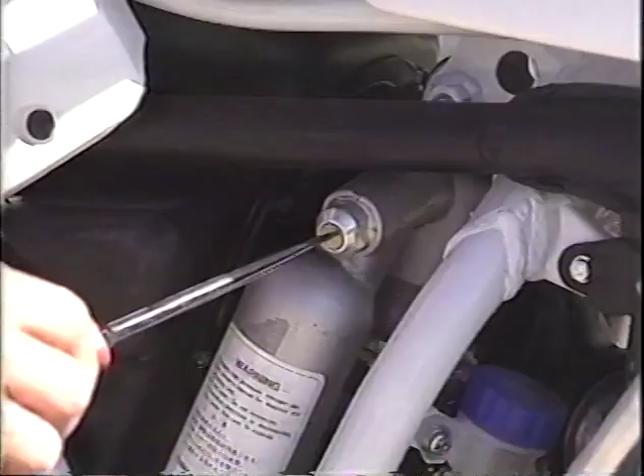When you've been racing motocross as long as I have, you learn to appreciate the benefits of fine-tuned suspension. Suspension can mean the difference in winning and losing a race. There are no tricks or shortcuts. You've got to follow the basics. Tuning the suspension on your YZ is not simply a matter of setting it and forgetting it. Instead, it's a process of testing, adjustment, retesting, and readjustment.

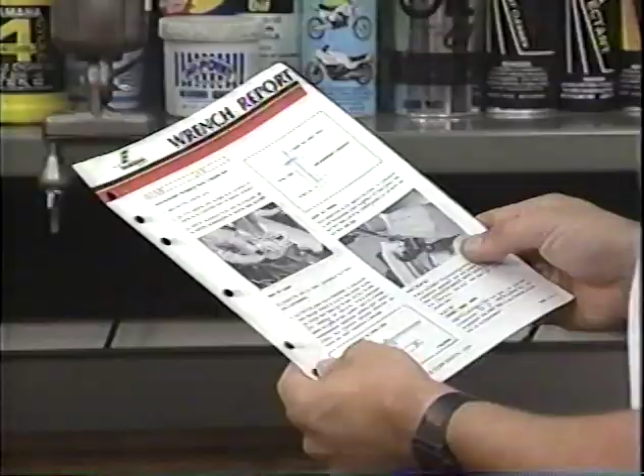So where do you begin? Ride height is your first adjustment. Ride height and other current suspension adjustments can be found in Yamaha dealer wrench reports for your model and rider's weight. Ride height, in our example, should be set to 96 millimeters. So just what is ride height anyway?

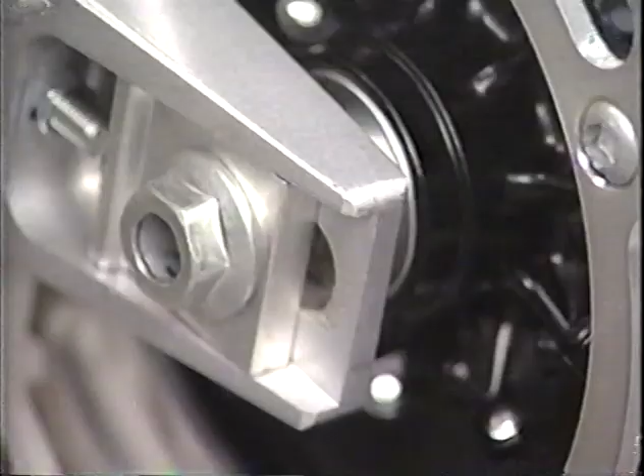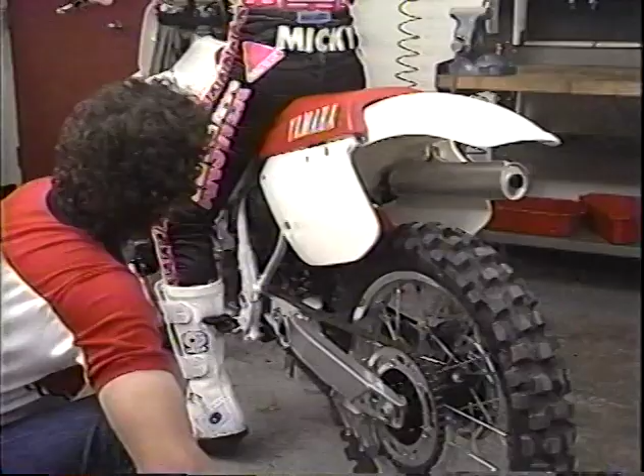To determine ride height, measure the distance from the rear subframe to the rear tip of the swing arm when the bike is completely unsprung. Then have the rider mount the motorcycle and center himself on the seat. Be sure the rider is suited up exactly as he would be when riding. Work the suspension a few times to avoid sticking and remeasure using the same points as before. Subtract the loaded measurement from the unsprung length to derive the ride height.

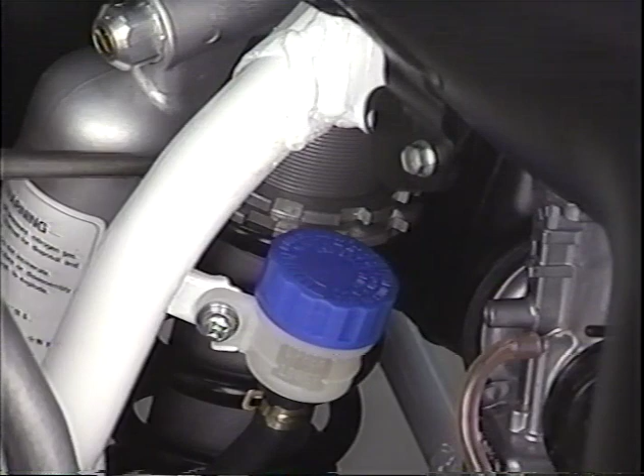If the ride height needs adjusting, loosen the lock ring on the spring and use a screwdriver to adjust the set length of the spring. Set length simply refers to the length of the spring as it is mounted in the shock. When you shorten set length, you shorten the ride height. When you lengthen set length, you lengthen the ride height.

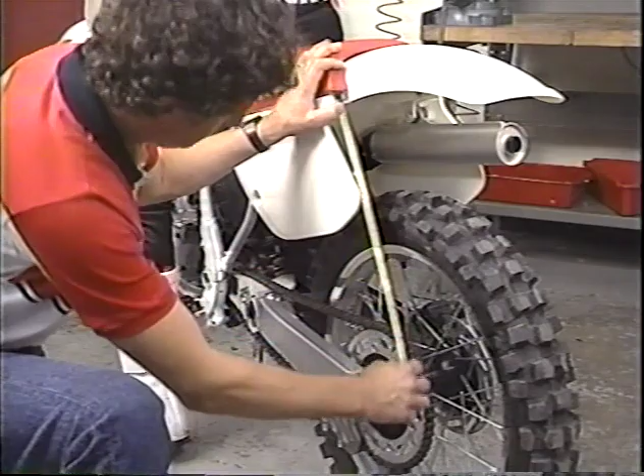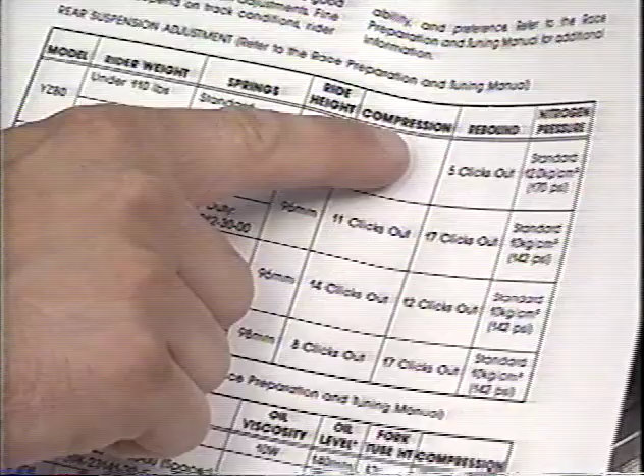Adjust the set length of the spring as necessary, then remeasure using the same points as before until the ride height is correct. Then lock the spring's adjuster nut down at the correct setting. Now you're ready to set up the compression damping. Again, use the specifications in the wrench report for the initial setup. Compression damping for the model in our example should be set at 14 clicks out.

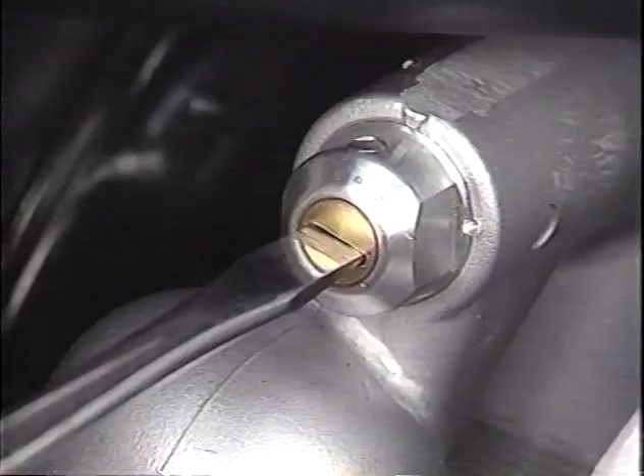Set the compression damping by turning the adjuster screw all the way in clockwise. Then back the adjuster out, counting the clicks. When you adjust the compression damping, you're adjusting the amount of resistance the shock exerts during compression. Back the adjuster out the number of clicks recommended in the wrench report, and you've preset the compression damping.

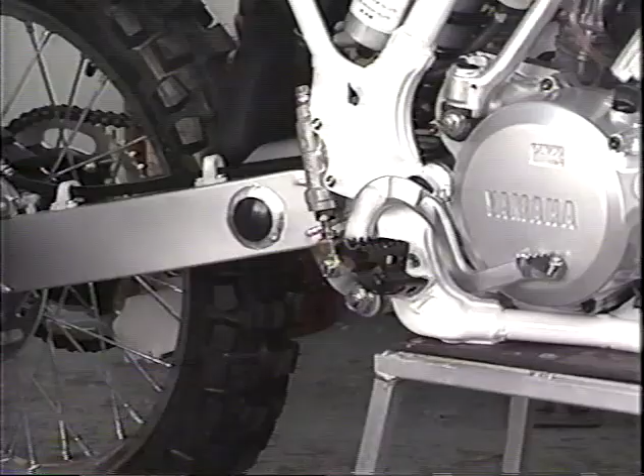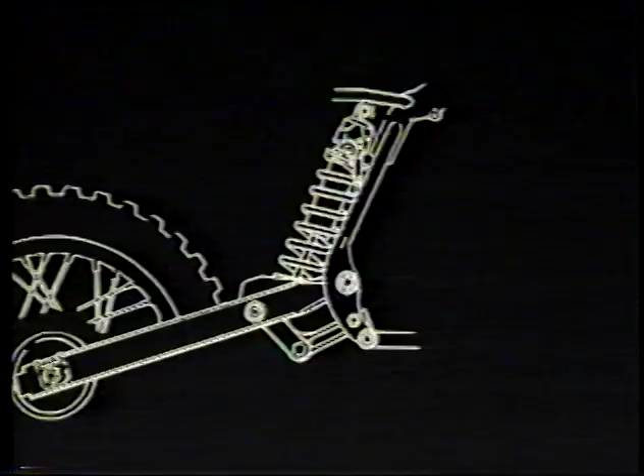Now set up the rebound damping. Rebound damping is adjusted at the base of the shock. Turn the adjuster screw clockwise until it stops. Then back it off to the number of clicks suggested in the wrench report. When you adjust rebound damping, you're adjusting the amount of resistance the shock exerts to reduce or dampen rebound. Preset rebound damping with exactly the number of clicks recommended.

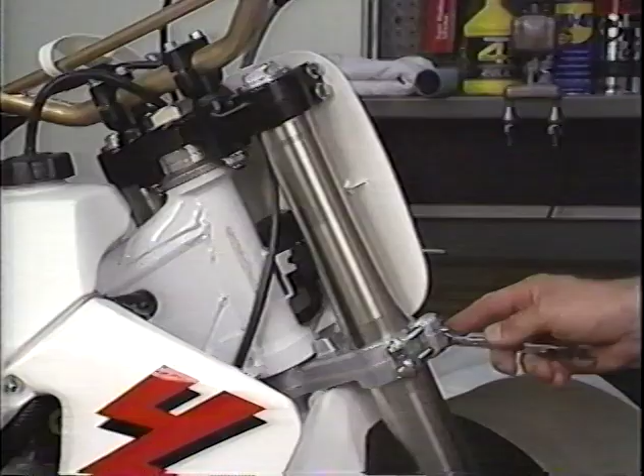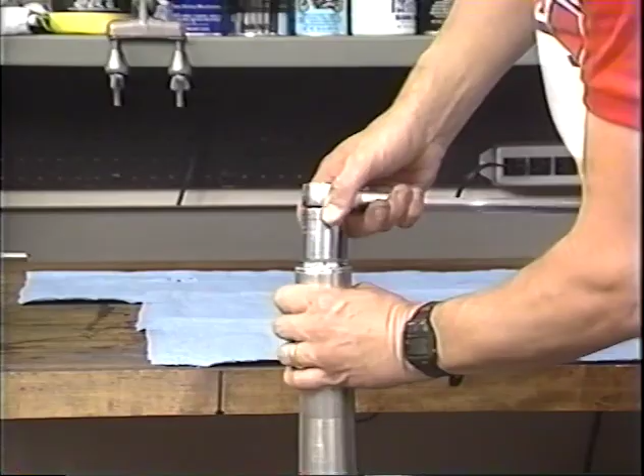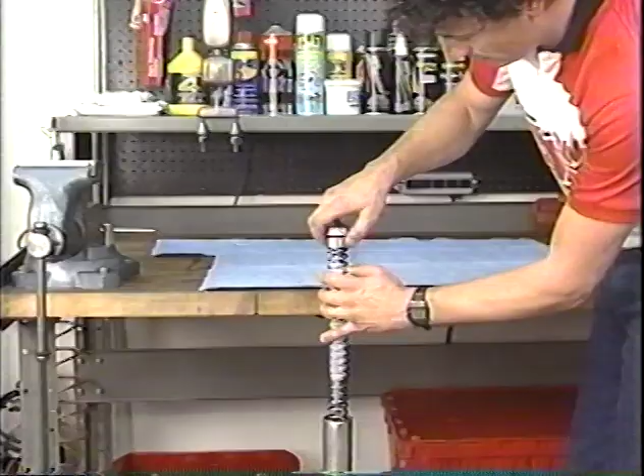Now check the wrench report for preset specifications on the front forks. Although it is not necessary for initial setup, you should always change to fresh fork oil during fork rebuild. It's easiest to simply remove the forks from the bike. This will allow you to make several setup adjustments easily, and during rebuild you can check the general condition of seals, bearings, fork springs, and other components as you disassemble the forks. Remove all components carefully. Of course, you should always refer to your owner's service manual for complete fork disassembly procedures.

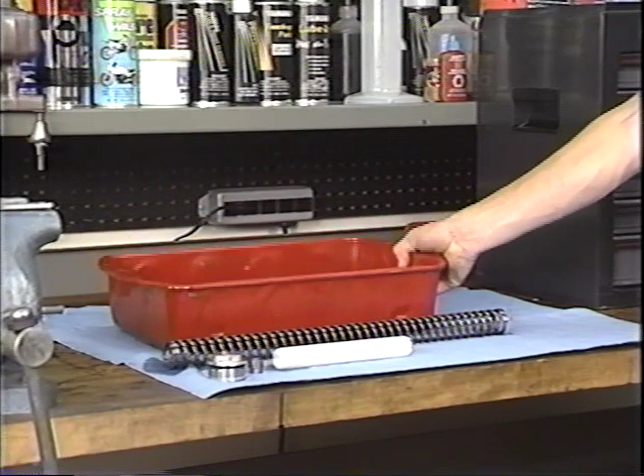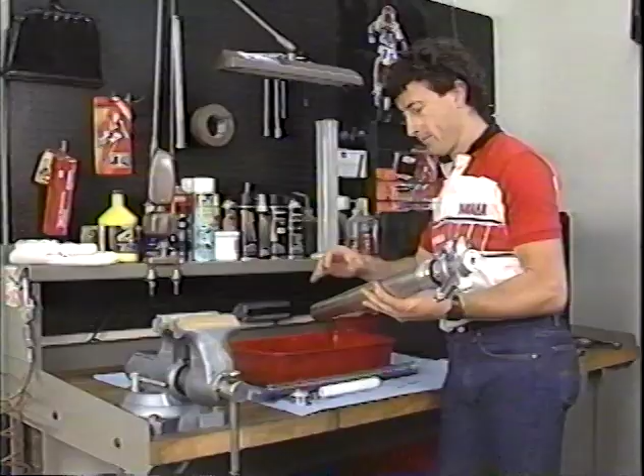Now, pick up the fork from the bottom clamp to avoid leakage and compress the forks over a drain pan to pump out as much of the old oil as possible. Be sure to hold onto the inner cartridge rod. Then mount the fork in a vise. To further disassemble the fork, remove the dust seal and the fork seal retainer clip.

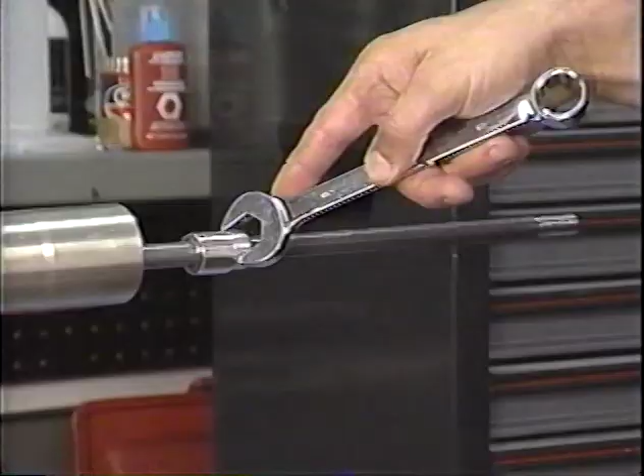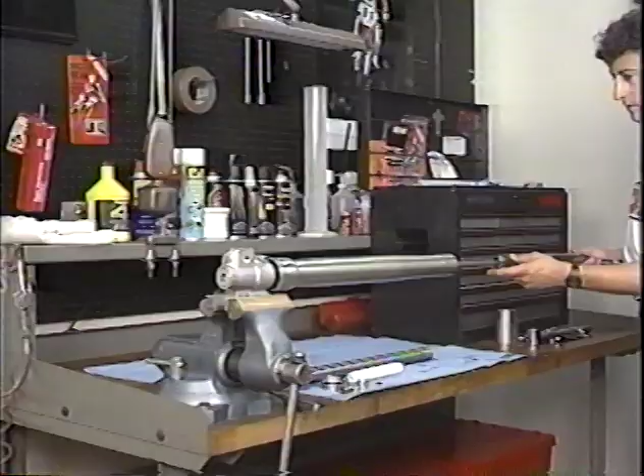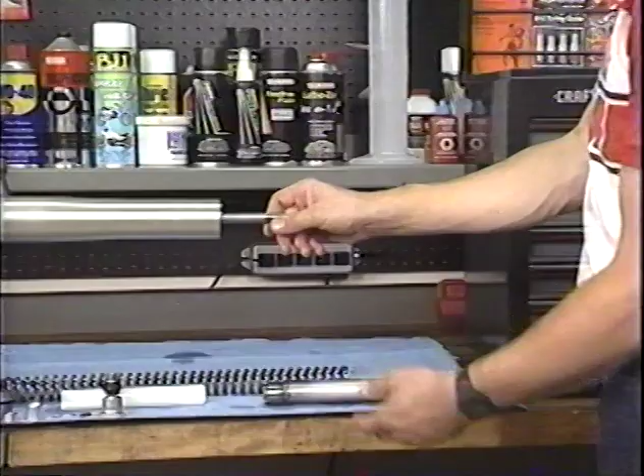Extend the piston rod, then unbolt the bottoming cone assembly, which will split into two pieces. Remove the retaining clip, slide the assembly off the shaft and insert the Yamaha cartridge holding tool. Now, loosen and remove the compression valve assembly. After removing the cartridge from the fork, grasp the fork tube firmly and use a slide hammer effect to remove it from the leg. Remove all components carefully.

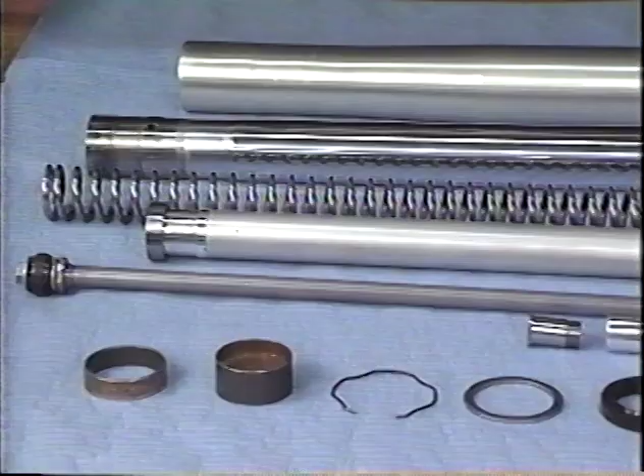Now is the time to inspect all disassembled parts. Any sign of wear on bearing surfaces indicates the bearings should be replaced. A good bearing will have a full Teflon coating as shown here. To retain optimum performance from your forks, replacement is recommended after 10 hours of use. All rubber seals should be inspected closely.

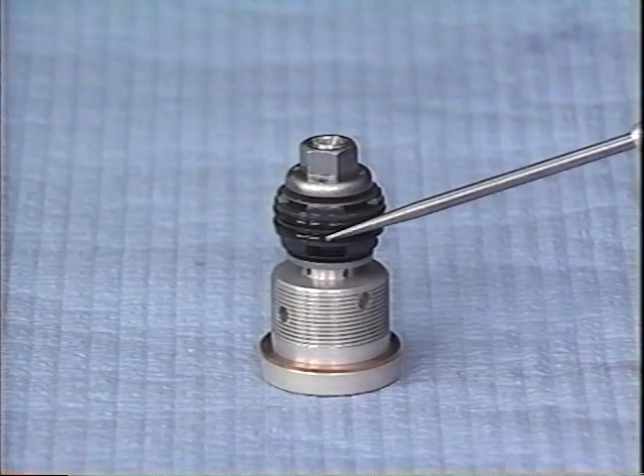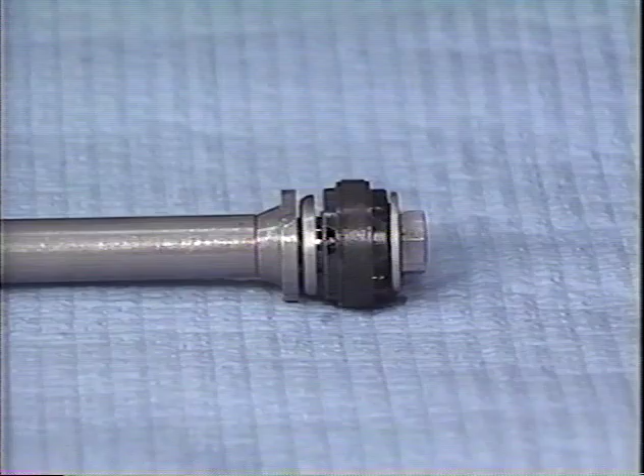Check the O-ring seals on the compression valve for tears or abrasions. Pull on the valve to check spring tension. Look for debris and make sure the shim moves freely. Replace the assembly if necessary. And don't forget to check piston rod valving using the same techniques as for the compression valve.

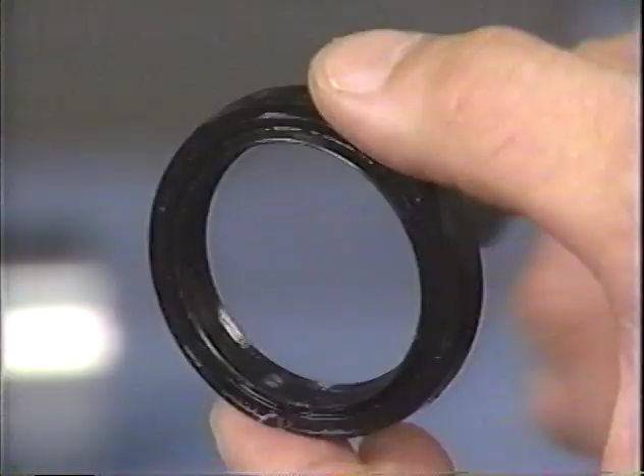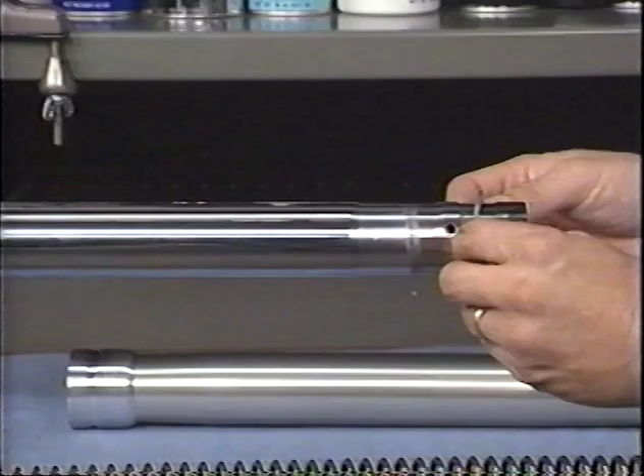Now refer to the Yamaha owner's service manual for complete fork reassembly. First, on the inner tube, install the dust seal and fork seal retaining clip. Apply a generous amount of grease to the fork seal and install. Make sure all parts are facing in the right direction. Next, install the washer and fork bearing.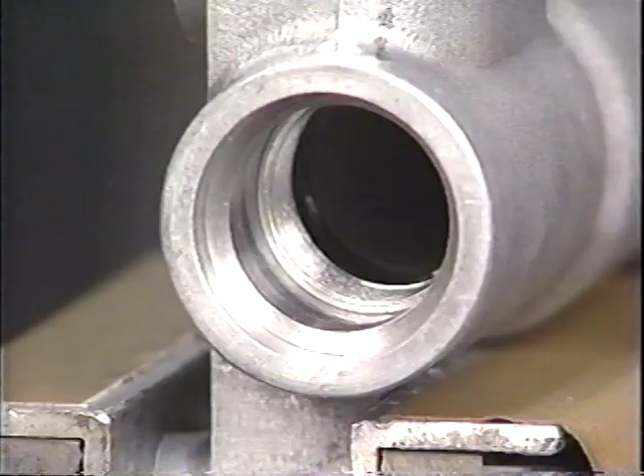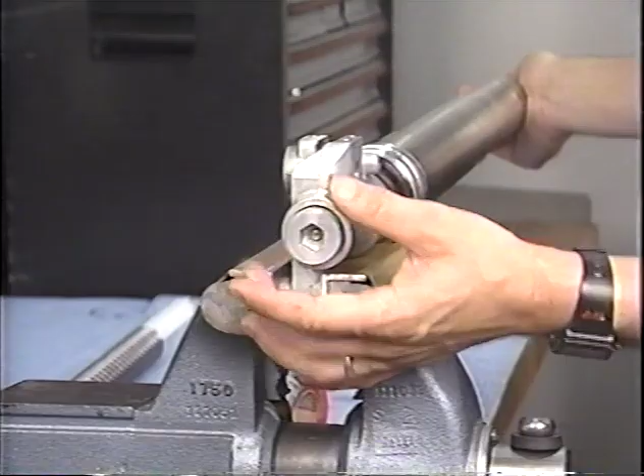The piston should then be installed onto the slot on the inner tube. Install the outer fork tube. Now, insert the piston rod into the cartridge and insert the cartridge assembly until fully seated. Then, replace the copper washer and compression valve. Be sure to grease both O-rings before installing. Torque the compression valve to 40 foot-pounds.

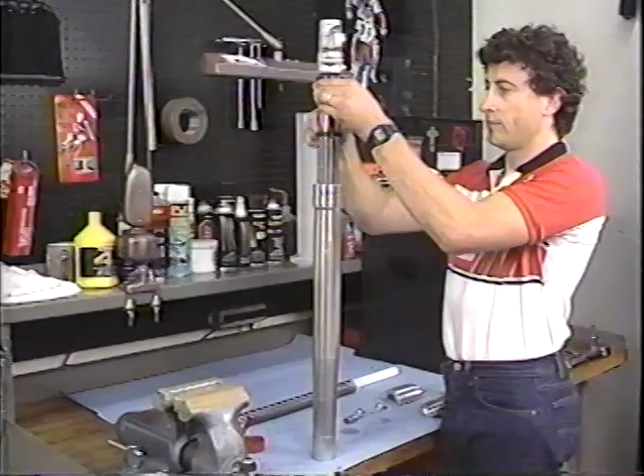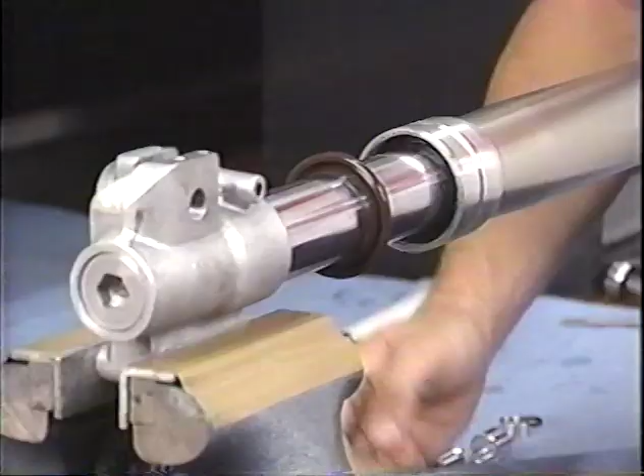Press the bearing into the fork slider using the Yamaha fork seal and bearing tool, making sure it is fully seated. Next, install the fork seal, again using the Yamaha fork seal and bearing tool. Replace the fork seal retaining clip until it is fully seated in its lower groove. Then install the dust seal.

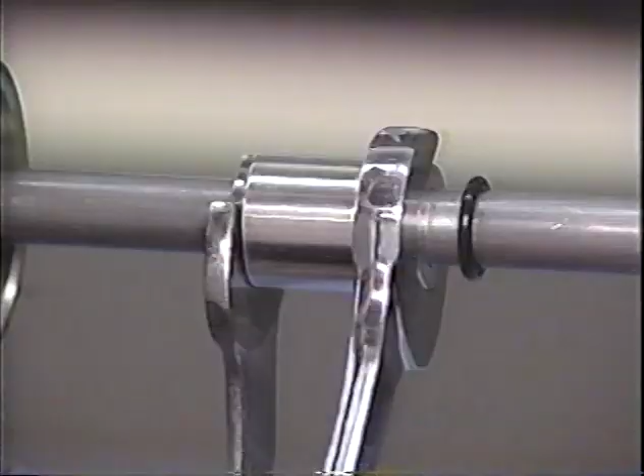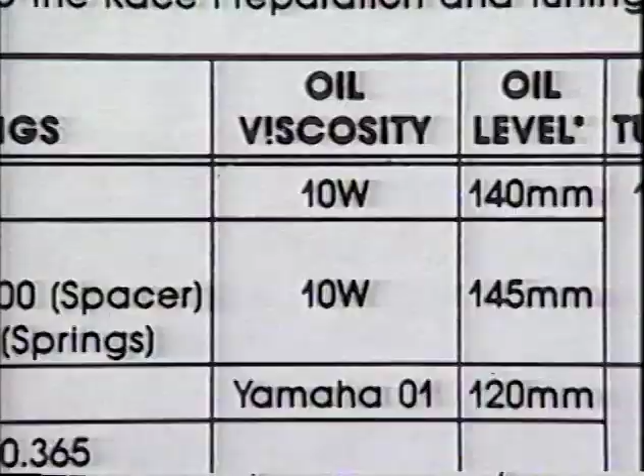Now, reinstall the bottoming assembly and don't forget to replace the retainer clip and be sure all parts are facing the right direction. Check fork tubes for smooth movement. You're now ready to add fresh fork oil. Again, consult the wrench report or owner's manual for the recommended oil viscosity. For cartridge forks, Yamaha 01 oil is recommended.

To get the proper oil measurement, be sure to install the spring guide and nut. Then add oil to the top of the fork. Work the outer tube not exceeding fork travel. And then bleed the cartridge assembly. Make sure all air is displaced from the cartridge. Fork oil level for your model can also be found in the wrench report.

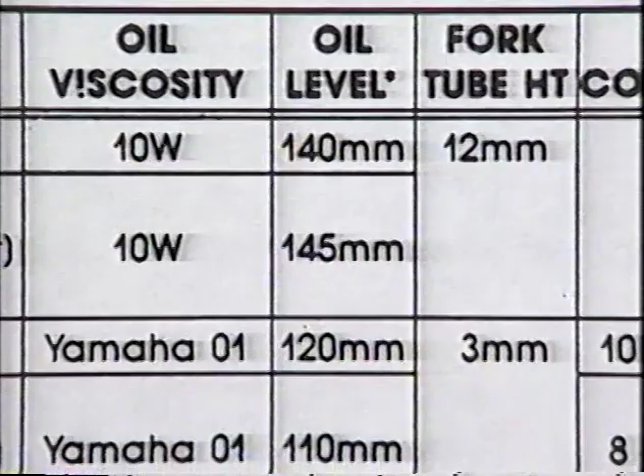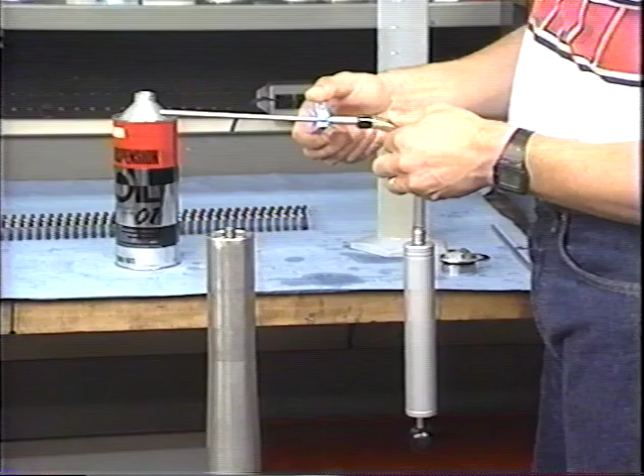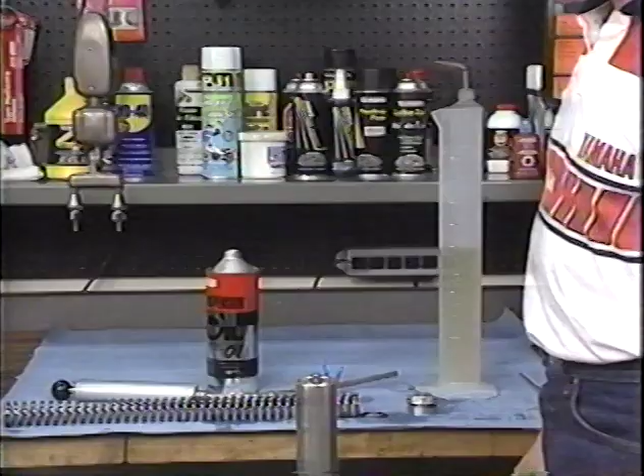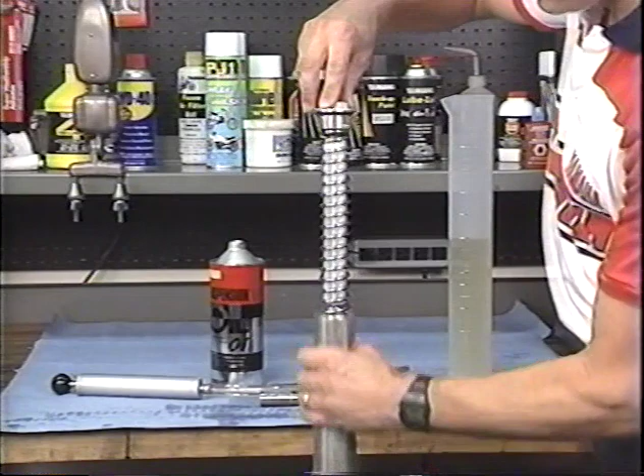Now you can reinstall all the fork components. Extend the cartridge rod and replace the fork spring over the cartridge. Then, replace the washer and finally the fork cap. Torque the fork cap to between 13 and 16 foot-pounds. And keep your race prep manual handy. You'll want to record all of your preset adjustments so you can refer to them later on after your test ride.

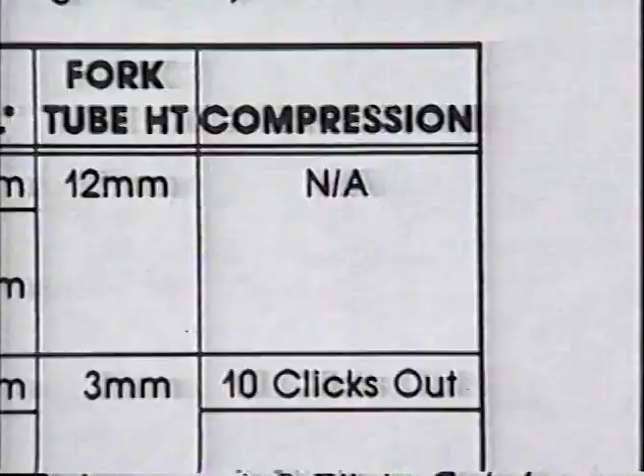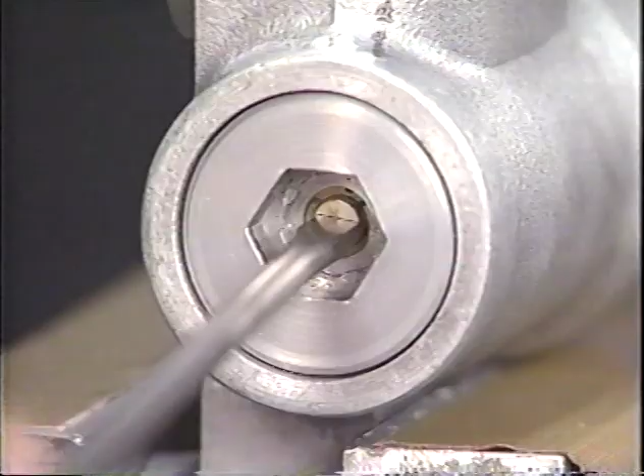While the forks are off the bike, it's easy to preset fork compression damping as well. Compression damping for the YZ in our example is set at 10 clicks out. Turn the compression damper at the bottom of the fork all the way clockwise. Then, back the adjuster out the number of clicks recommended for initial setup on your model. Reinstall the forks on the motorcycle.

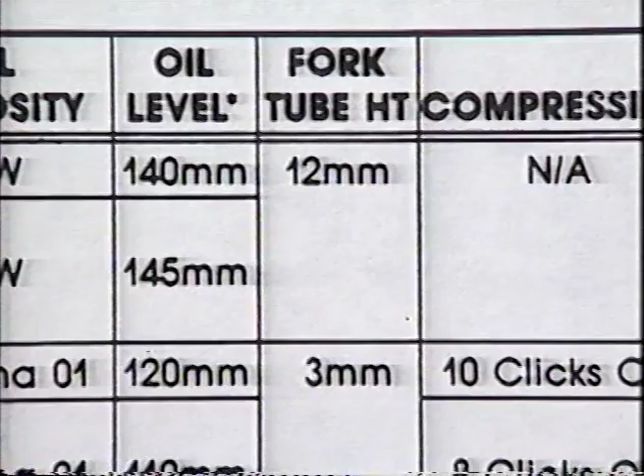Now, consult the wrench report for the fork tube height preset. Set each fork tube at the recommended height. With the fork loose, measure from the top of the triple clamp to the top of the fork tube, which is the seam below the fork cap. For optimum performance, it is crucial to torque crown and triple clamp to Yamaha specifications.

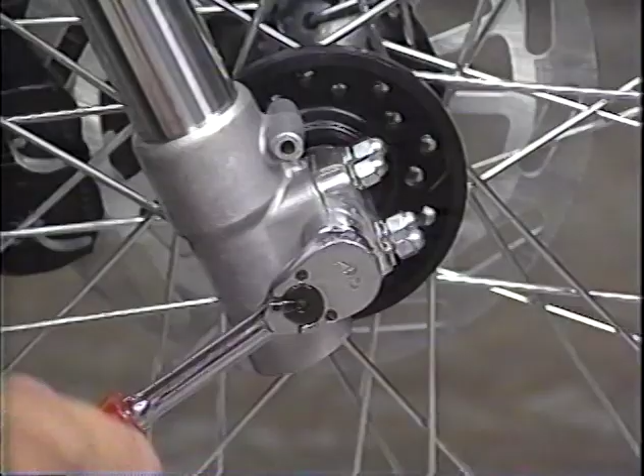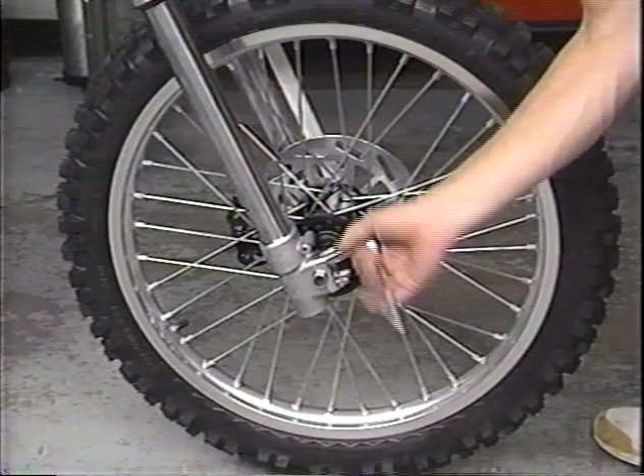Remount the wheel and tighten the axle. With the clamp still loose, compress the forks to relieve the clamp side of the fork from binding. And don't forget to lock down all bolts and check fork protector alignment. There's a lot riding on your suspension tuning skill. Don't forget to check air pressure in the tires. Tire pressure may not seem important, but it is a significant part of your YZ's suspension system.

When you've finished and double-checked your initial suspension settings, your YZ is ready for break-in as described in your owner's manual. The initial suspension settings recommended in the wrench reports and manuals are good starting points, but comprehensive tuning actually takes several riding elements into consideration: the rider, his ability, his weight, and style; the suspension itself, its features, controls, and condition; and the course or track, its surface and layout.

With experience, the rider who learns basic suspension tuning skills can apply them as his skills and style grow, and on various tracks and terrains. Once the suspension's broken in, you're ready to begin the process of track testing.

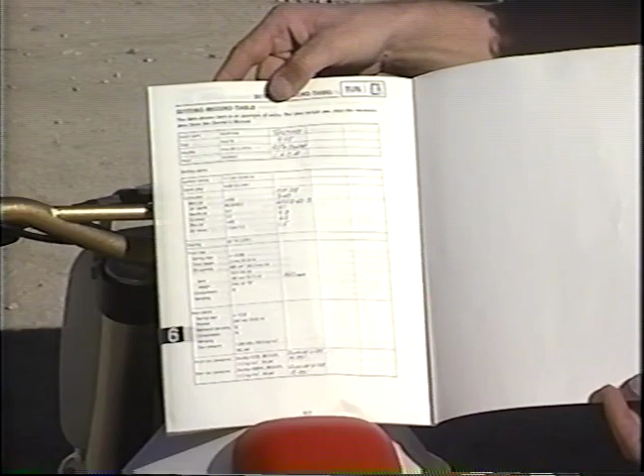And track testing is just that, a process of testing, adjustment, and recording tuning changes. Use the table in Yamaha's race preparation and tuning manual to log the setup specs you adjusted before break-in. Later, you'll use these setup specs to compare to the fine adjustments you make on the track. They'll keep you on target, and it's easy to get confused during active track testing, so have a friend watch the bike as you ride to help record suspension action and spot obvious problems.

Once you're on the track and you've done a few laps for familiarity, try to ride the bike in the same lines. You've just set up the suspension to a base reference value, so regulate your riding style and try to eliminate the natural tendency of the rider to compensate for the suspension. Let the suspension do the work as you try to simulate actual speed and style during race conditions.

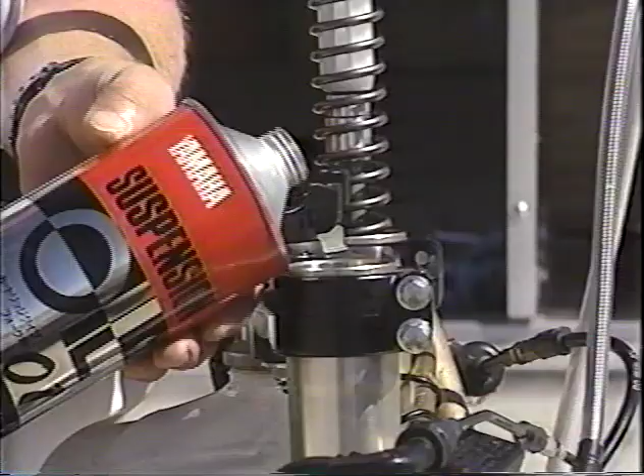Then, focus your attention on one part of the suspension and how it's working, say the front forks. Isolate and examine how just the forks feel. Do they bottom out even off medium jumps? Front-end bottoming or dive can be caused by several factors. If you eliminate each problem systematically, you'll quickly tune a front end that's a little too soft for your style and situation. If the front end bottoms, first try adjusting the oil level in the forks.

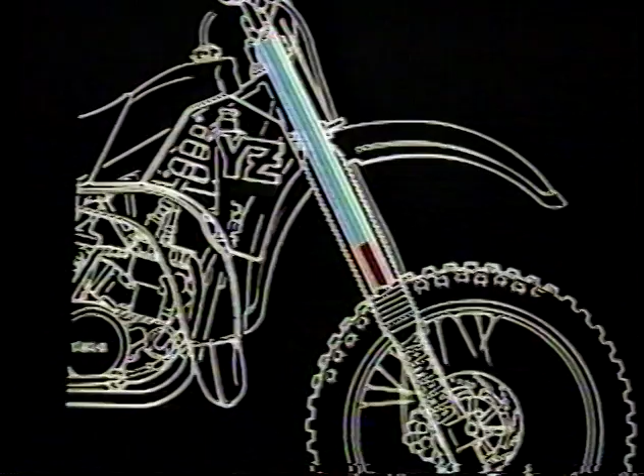Before adjusting fork oil level, though, let's review a little suspension theory. Inside each fork tube, a small pocket of air, which is compressible, is displaced by fork oil, which is not. Together with the fork springs, this air cushion is what absorbs shock to the front wheel. When the fork contains less oil, and therefore more air, the front end will be softer. When there is more oil and therefore less air, the fork will be stiffer.

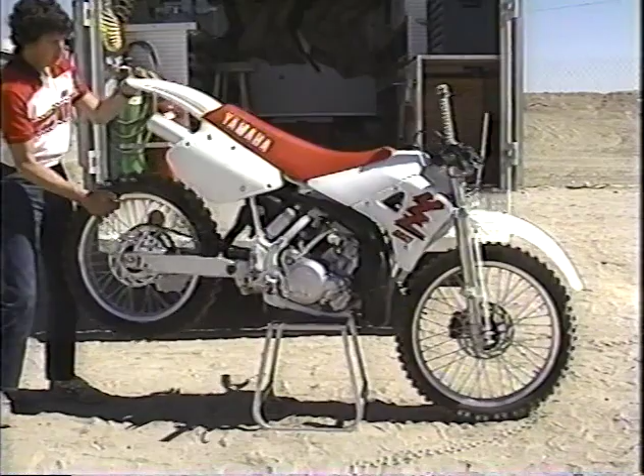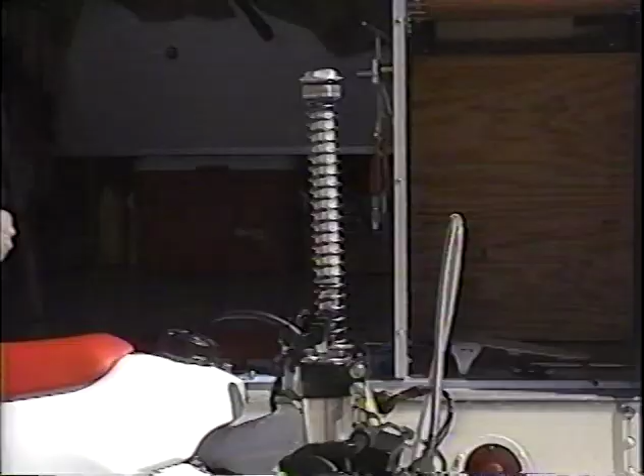Bottoming results from forks that are too soft. So to stiffen fork action, you should add fork oil. Support the bike and tilt it forward to fully compress the forks and keep them vertical. Then add fork oil of the proper viscosity as before. Set the fork oil measuring tool 5 millimeters lower than your setup height, and withdraw oil until the new oil level is where you want it.

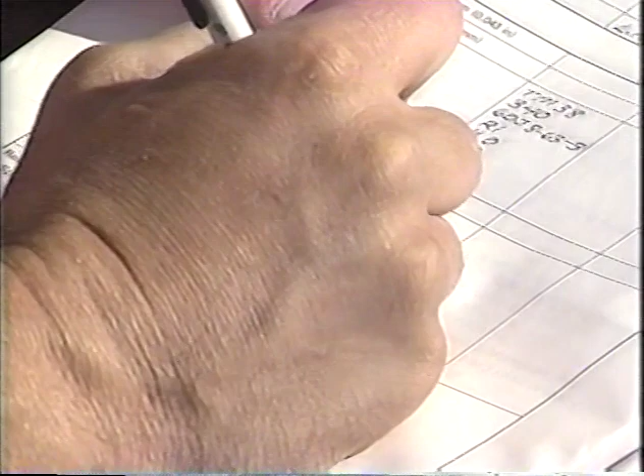Always make changes in small increments, and make a note of the change. Remember, 5 millimeters less measurement here means 5 millimeters more oil in the fork. Then, retest the suspension. You may need several adjustments to achieve a proper setting. And don't overdo it. A small change in the wrong direction can create forks that are too stiff and don't allow the full travel of fork compression.

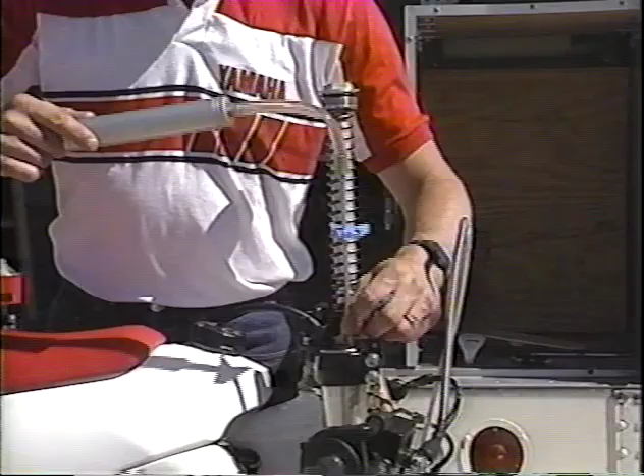Stiff forks usually have too much oil, which displaces that air cushion and causes stiff fork action. To soften a stiff fork, remove 5 millimeters of oil with the oil level measuring tool as before, and make a note of the change. Don't trust your memory, write it down. Then retest the suspension and repeat the process until the front end feels right under the same conditions.

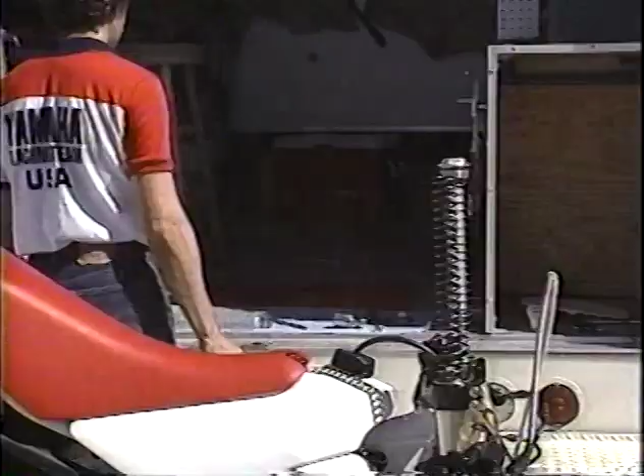If the forks are still too stiff or soft and you've run out of oil level adjustment, consider changing to a different fork spring. Yamaha provides fork springs in several different spring rates. Remember, only change springs after you've exhausted all your fork oil level adjustment.

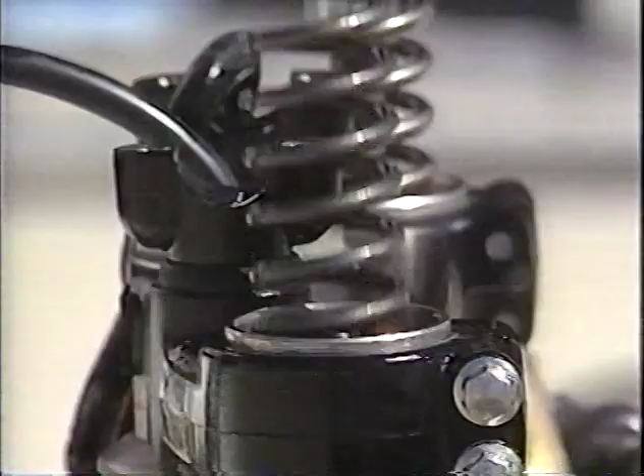These forks are properly adjusted. The bike uses all the fork travel without bottoming on a medium jump, yet they are soft enough to absorb smaller bumps as well. If your forks are okay over most of the course but seem a little stiff over smaller bumps, consider changing the fork compression damping from the preset adjustment. Remember, make all changes in small increments and make a note of the change.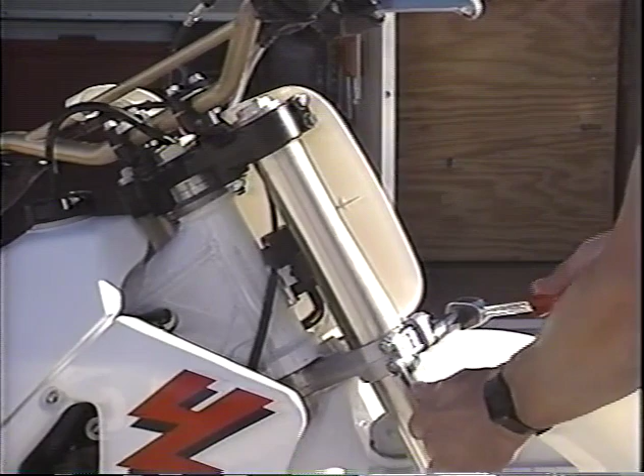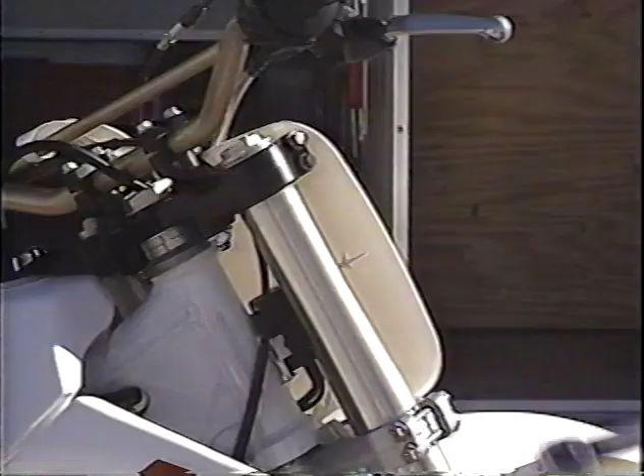If your forks are okay over bumps and jumps, but suffer from head shake in the straights or oversteer, which is steering too quickly through turns, improper fork tube height could be the cause. Oversteer or knifing can result from a fork tube set too high. To adjust fork tube height, loosen the fork clamps as before and lower the fork tube just a millimeter or two at a time. Lock the fork at the new setting and retest.

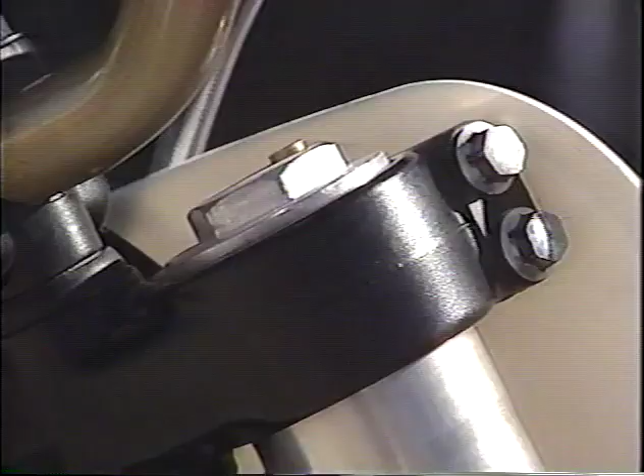Again, don't overdo it. Here's the opposite problem, understeering, which causes the rider to go too wide into the turns. To correct understeer, raise the fork tube height in small increments, 1 or 2 millimeters at a time, and make a note of your change for future reference. Then retest the bike until you get the result you're after.

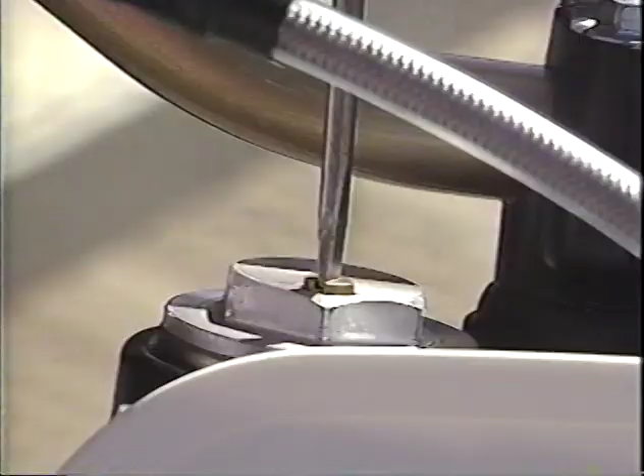Remember, after each race or test ride, you should release any built-up air pressure from the forks. Now you're ready to focus your attention on the rear suspension, and it's a good time to recheck the ride height.

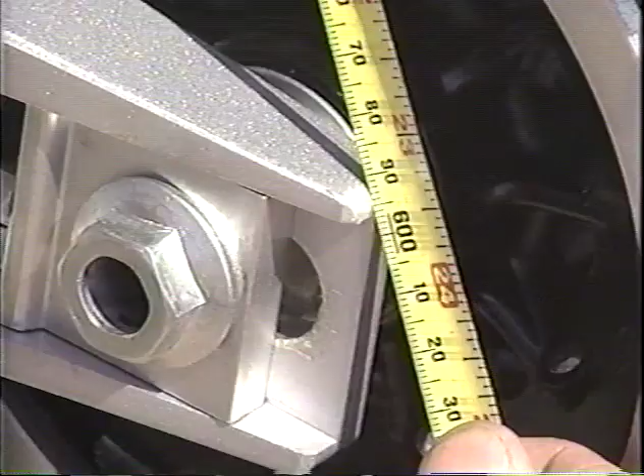Working the shock spring during break-in and track testing may cause the spring to change its set length. Always recheck the ride height before each moto, comparing the unsprung measurement with the one you get when the rider's aboard. After you have rechecked and readjusted your ride height during break-in, check to see how much the rear end settles on its own weight. It should settle 20 to 30 millimeters from topped out.

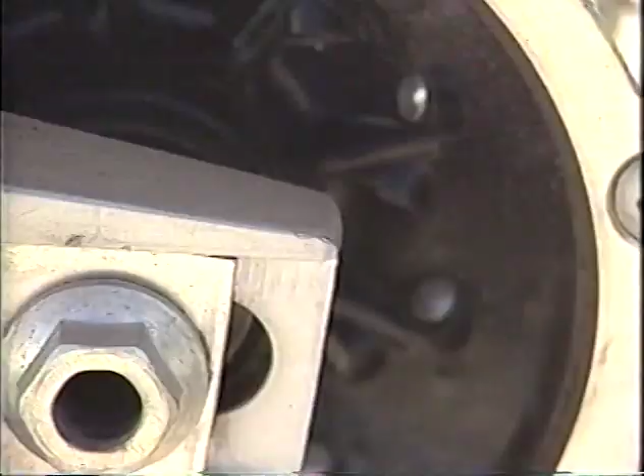If the rear end settles more than 30 millimeters, then your preload is too low, and therefore your spring is too stiff. If your bike settles 15 millimeters or less, your preload is too high, and therefore your spring is too soft. Both cases will impair suspension performance, and switching to the correct spring rate is recommended. Remember that when you change a spring, you'll have to readjust the ride height due to the new set length of the spring. You should also reset the compression damping and other rear end adjustments to setup specs again.

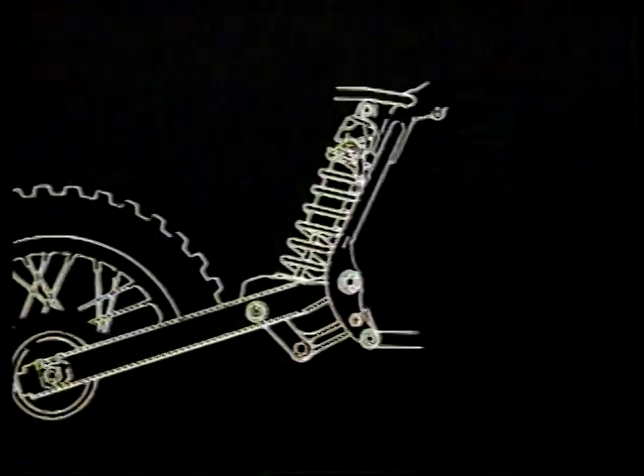As you're testing the motorcycle, concentrate on how the rear end is performing. Does it tend to bottom out after average size jumps? Rear end bottoming might be the result of incorrect ride height, or it could be that the shock's compression damping is set too soft. When you adjust the compression damping, do so in small increments. 1 or 2 clicks here is plenty. And make a note of the change so you don't get confused later. Remember, when you're adjusting compression damping, you're adjusting the amount of resistance the shock exerts against the compression of the suspension.

Here's the opposite symptom. The rear end is just too stiff, even over an average-sized jump. If the rear end is too stiff, turn the compression damper out a few clicks counterclockwise and make a note of the change. A properly adjusted rear end uses the full suspension travel without bottoming over average jumps, yet absorbs smaller bumps as well.

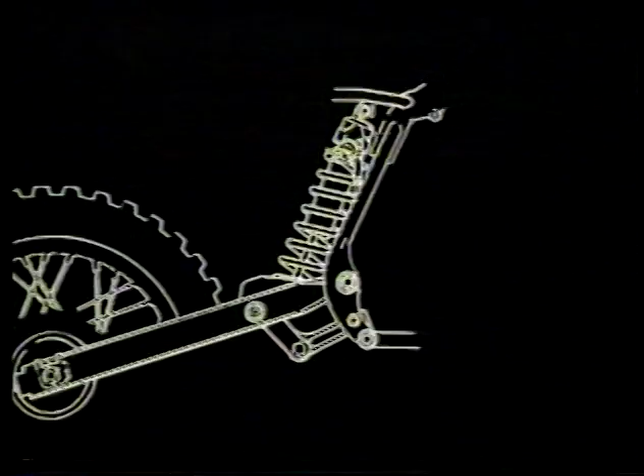Sometimes the rear end will be okay over single jumps, but may pack over the whoop-de-doos. Packing is when the suspension compresses over one bump without rebounding quickly enough to absorb the next bump in the series. As shown here, the wheel will pack up under the fender instead of rebounding to absorb the next bump. If the rear packs, you should decrease the rebound damping by turning the adjuster counterclockwise 1 or 2 clicks at a time. Remember, when you decrease rebound damping, you're decreasing the amount of resistance the shock exerts against rebound.

If the rear end kicks you into front wheel landings or creates a pogoing effect as it kicks up in the whoops, the rebound damping is probably too quick, causing the suspension to kick as shown here. To reduce kicking, increase rebound damping by turning the adjuster clockwise 1 or 2 clicks at a time until the springiness is eliminated. Here's a properly set up rear end. The shock allows full compression of the suspension without bottoming, and yet rebounds in time, ready to absorb the next bump in the series. In rare cases, the nitrogen pressure in the rear shock might also affect shock performance and should be checked against specifications, but only by qualified Yamaha dealers.

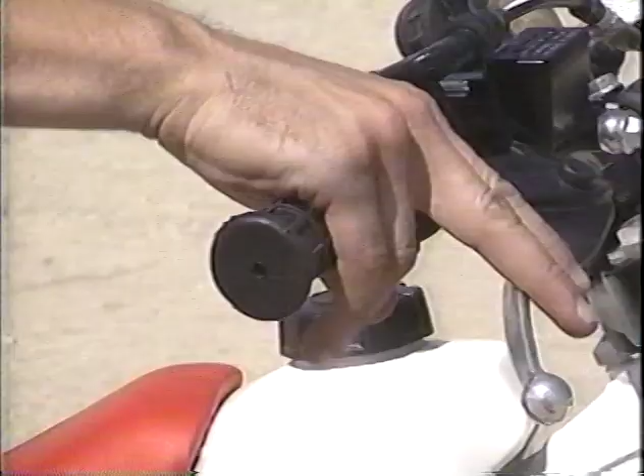If you've tuned your suspension using the techniques shown here, the front end and rear end should be balanced. To be certain they are, though, you should perform one final check, the static balance test. Apply the front brake, put one foot on the foot peg, and push straight down several times. If the bike remains level as the suspension is compressed, the front and rear suspensions are balanced. If not, you'll have to readjust the suspension using the techniques you've learned. Once the front and rear suspension compress evenly, your YZ should be ready to take on the track and the competition.

Now let's take a look at a properly tuned YZ suspension in action. Notice the rear wheel uses almost all the shock travel without bottoming, and that the wheel doesn't pack, even over the whoops. The front end also compresses fully on normal jumps without bottoming, yet remains soft enough to absorb smaller bumps as well. In general, the entire suspension seems balanced front and rear around the course.

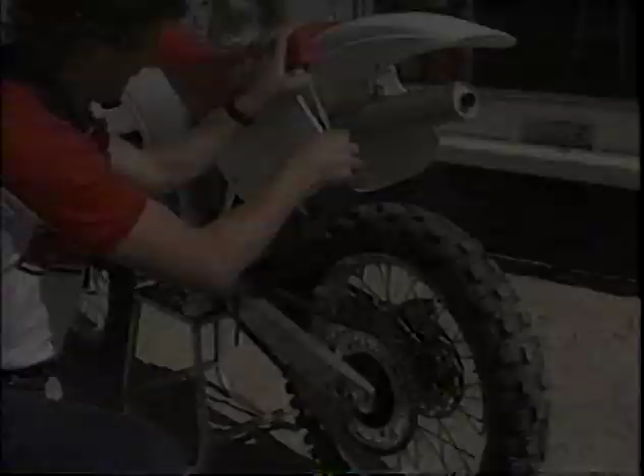So if you're ready to compete professionally, or you're just serious about wringing the last ounce of performance out of your YZ, don't resort to black magic. Use a systematic approach to suspension tuning. Preset your suspension. Make changes in small increments. And record your adjustments in order to tune systematically. It may just pay off bigger than you think.